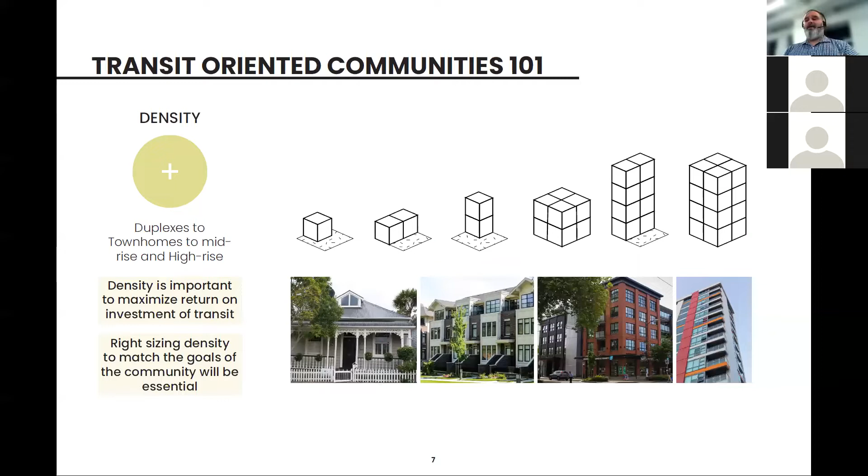I want to begin with a little bit of a primer concerning transit-oriented communities. What does this mean? For us, it means 3 things: the 3 Ds, density, diversity, and design. When we talk about density, it's not just about putting high rises next to station areas, but it's about curating the right kind of housing typologies, development typologies that would complement existing communities, but provide a variety of housing offerings or job offerings in the area itself.

When we talk about diversity, it's not just about the people, but it's really the who, the what, where, and when of a site itself. So it's everything from building typologies, the types of activities along the corridor that may complement each other, as well as that population, not just who's here today, but who's wanting to be here or looking for an opportunity to live in the community itself, but may not have those opportunities unless it's in these types of communities.

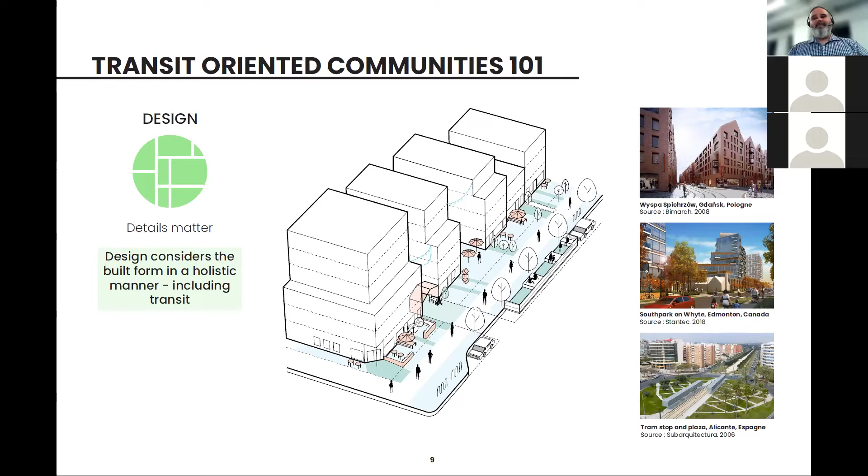And then lastly is design. This is sort of the devil's in the details. It really matters for us to understand the private development side and the public realm, and how does it interface with each other? How do we connect these through different policies and regulations so that everything meets in the middle and creates this seamless interface in our communities?

For this project, we have 4 guiding principles. These are from previous study elements; we're just adding to that as we move forward. First is PEDs, pedestrians and bicyclists. We want to make sure that from the station itself, you become a pedestrian or bicyclist at some point, whether it's transferring to a bus and then walking your last piece, or walking from the station to somewhere else. So we want to make sure that environment's comfortable and direct and clear and safe.

Development is part of this. We want to encourage development that helps create vibrant neighborhoods and manage growth, so that we're really thinking about it in a strategic way, and that everyone understands the opportunities and possibilities, and looking around those corners to understand what market pressures may change once this rail line is built and operating.

We want to create places. We want to capitalize on stations as placemaking opportunities. So we want to think about them as far as are there areas of gathering or park spaces or plazas or great architecture that needs to interface with that as well.

And then lastly, we want to elevate the transit experience. Quite literally, we just want to make sure that people who are riders by choice, but also riders by need, feel comfortable, that it's a mode of choice for them, that it feels safe and reliable. And that all starts at the ground level and works its way up into the platform and beyond.

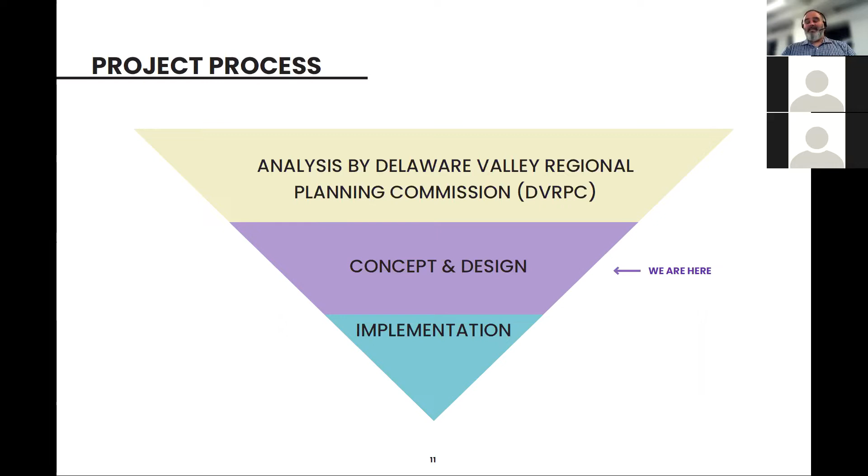So we were trying to think broadly about this and what it means for implementation, and breaking that down as we move forward. This is built on the original analysis done by the DVRPC in 2019, and we'll talk a little bit about the influences of that right now. Some of the key takeaways from this report - it was a really great report of understanding the physical area at that time.

There are 4 key components: transit-oriented development, so the buildings themselves. We need to understand how we can diversify building types that are complementary to the existing community, identify any regulatory changes, zoning codes, or policies that would help support that, but also want to make sure we support ideas around parking management, because while transit may be a key component within this, we recognize that parking will continue to play a role, but how can we think about it in creative ways and make sure new development is right-sizing parking both for the users there, but also visitors and day-to-day needs.

Pedestrian and bike infrastructure itself - we want to make sure we close the gaps around station areas and really improve safety.

Safety is really top of mind when it comes to pedestrian and bike infrastructure, particularly at key intersections, which we'll talk about at each station. Placemaking is an additional consideration, both the public realm improvements, but also using parks and trails as connections through these areas and communities. And then lastly, we want to help identify any funding sources, toolkits, and an implementation plan that can help support these changes, whether it's the public realm improvements themselves or signalization for traffic lights. We want to make sure we're thinking about this holistically, from the infrastructure to the private development side and the community benefit as well.

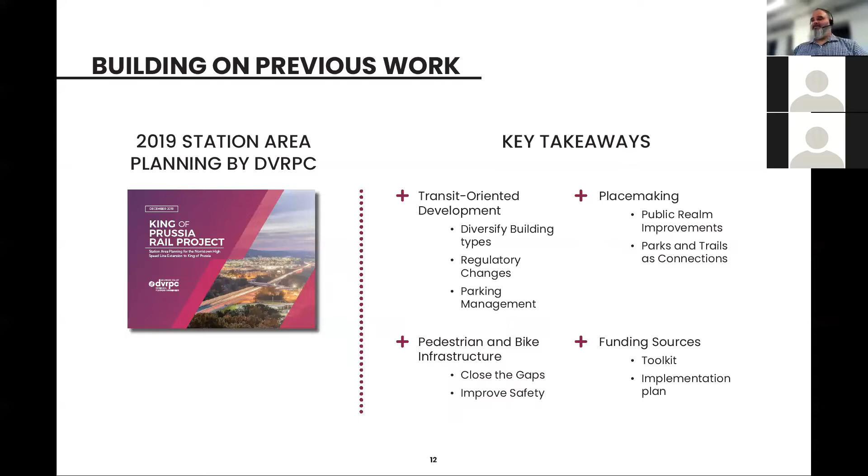Our engagement sessions are set up in three components. The first one is tonight, we're gathering ideas, we're highlighting to you opportunities and constraints that we see on the ground, both on our site visits, but also in analysis of previous work. We want you to weigh in on that as well. There will be a survey at the end of this presentation that will showcase each of the station areas, opportunities and constraints, so we'd really like your input. You live here day to day, we'd like to hear your input.

And then when we come back to you in April, we'll express to you what we've heard, show the work to date, how your comments have influenced that work, and discuss the strengths and weaknesses of each concept collaboratively, so that we can come back to you on May 3rd with how all of that information informed the final report and any additional final comments, just to make sure we're getting it right at each stage of the work that we're doing here.

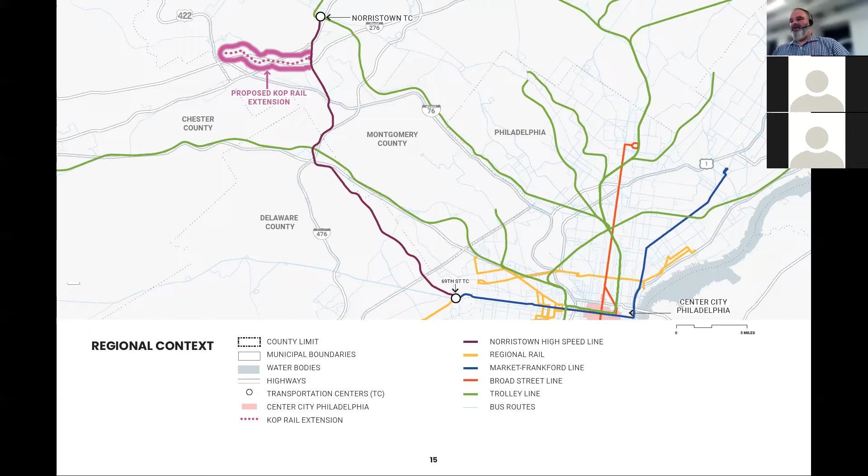As most people know, the proposed KOP Rail extension is an offshoot of the Norristown high-speed line. These 5 stations are located throughout the KOP area. Henderson Road is sort of on its own, but Allendale and Mall Boulevard are in close proximity, though they have very different service needs. And then First and American are clustered with First and Moore. While they are within walking distance, they also serve very different areas of the community itself.

So we're going to pause here and just get a little read of the room to understand where everybody either lives or works in this area. The first question is, of these 5 station areas, which one do you live closest to? Note that there is sort of that 6th option if you live outside of Upper Merion Township. We'd like to know that as well. So a few seconds here.

Okay, looks like the majority are living outside of Upper Merion. Okay, looks like majority of our users. Yeah, so we got 45% of you living outside of Upper Merion Township. Highest ranking, 23% living around Henderson Road, 10% at Allendale, 6% at Mall, 10% at First and American, and 8% at First and Moore.

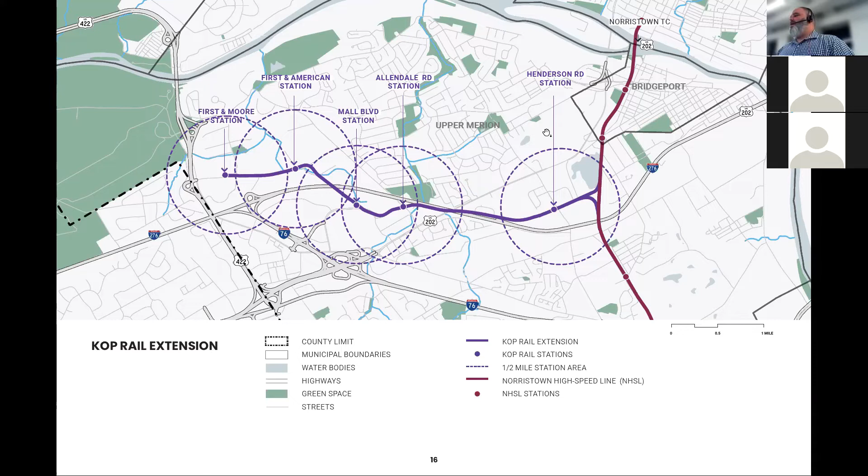So we like to understand these pieces simply to see if you're living in this area, how the changes may affect you, or even if you're working in this area, how it may benefit you as well, or benefit people around you. We want to also just talk a little bit about the world, both locally and nationally.

Things are continuing to change, but we just have some demographic information that really highlights the need to think about this in very creative ways. The first is that household growth is faster than any county, with a projected 12.7% growth in 2026. As well, within that household growth, we see more renters coming on board. Now, that isn't just a local trend, we see that nationally as well. We'll get to that point in a minute.

But we also see population growth driven by older adults and mid-career adults as well, so those may be people settling into long-term couples as well. People are living single longer these days, but looking for that growth as how it fits within household income as well. We see more disposable income, larger area income than elsewhere in the county. But nationally too, we see a growing trend of how families are living, and people are living very differently than they were 50 years ago or even 30 years ago.

We see a traditional market for single family houses is shrinking throughout the entire nation. But our housing supply continues to not match the needs of people looking for a variety of housing that isn't single family. It may be townhouses or multifamily, but our current supply doesn't match that demand. That's why we're seeing this continual housing conversation: we need to build a more variety of housing in different locations to provide that spectrum of living that people are looking for, both from what they choose to live in the market, and what matches their affordability opportunity.

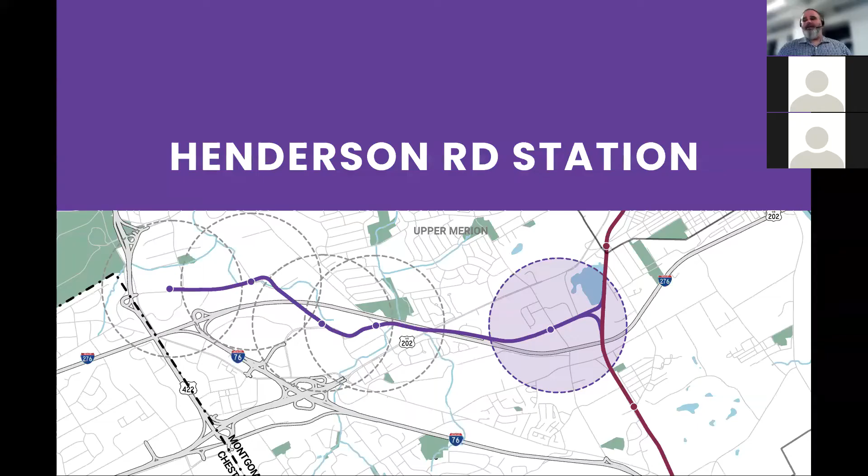With that, we want to start to dive into each of these station areas and our strategic approach. First is Henderson Road, and you're going to see a series of maps for each one. First are the physical constraints that we talk about, next are the physical opportunities, and then we'll show some identification of where we're going to be studying the possibilities of transit-oriented communities within each of these station areas.

To orient you a little bit, the purple dashed line is what we call a walk shed. That is a 10-minute walk from the station itself, which is analyzed through GIS to understand the connectivity of that station in its current form. We're going to test this both before and after our concepts to look at what that 10-minute walk shed may look like in the future if we improve sidewalk connectivity and connections throughout the area.

We do note a number of intersections that currently are uncomfortable for pedestrians and bicyclists due to their current design, so we want to look at potential upgrades or transformations that support additional infrastructure. It is a site with a number of physical barriers - there's a utility line on the south side, and a number of block structures currently have no sidewalks or gaps in the sidewalks that prevent that walkability context. Where we see opportunities are the improvement of intersections using Henderson Road as a great connectivity component, right-sizing the infrastructure in that area, as well as potentially connections to the proposed pathways and using the escarpment as an additional connection to the west.

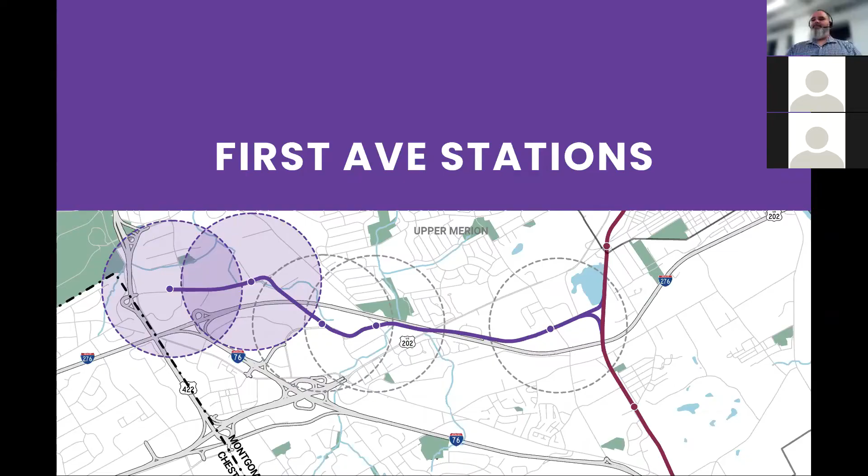Lastly, our First Avenue stations. These are in the KOP Business Park primarily. First being one of the larger connector roads and having the linear park program as part of this continues that strength of connectivity over time.

Being an end of line at First and Moore and connecting to Valley Forge as a connector through either bus service or future trailways is going to be important.

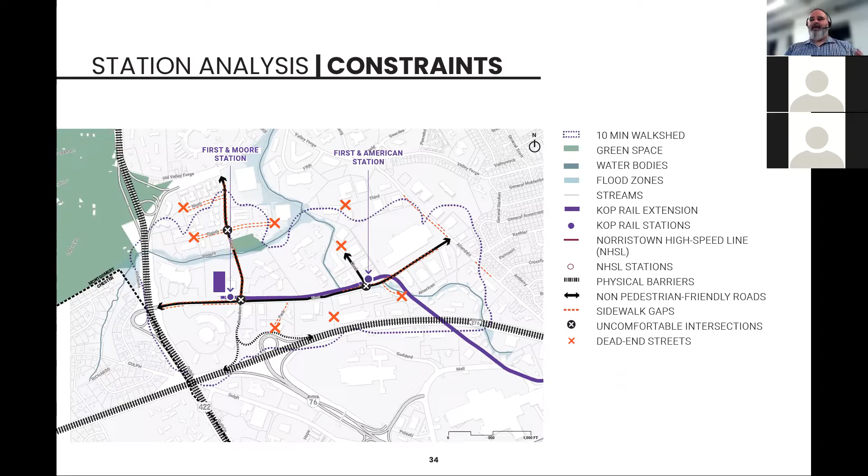But also noting that there are elements of nature. While they may be a constraint with floodplains, we see them also as opportunities for potentially adding additional amenity over time, or interfacing development with those pieces that are going to be highly desirable places to live or work.

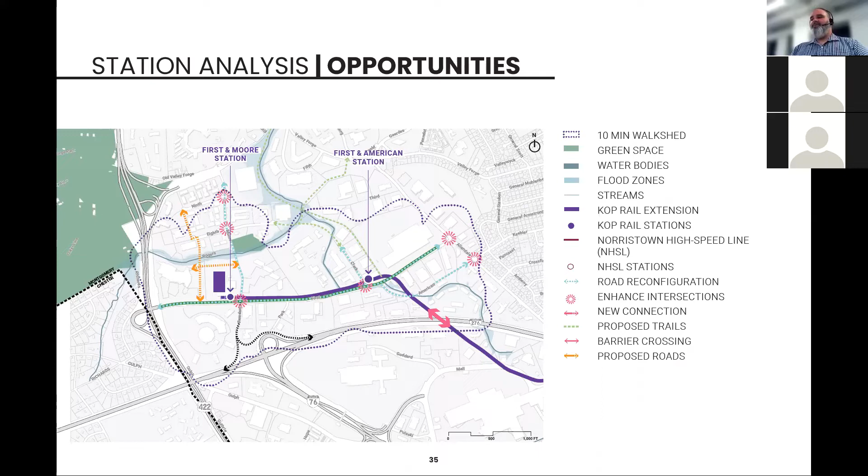We continued looking at these sites based on the 2019 station area planning. A lot of this information as opportunities continues from that, reinforcing First as an east-west connector for ped and bike, but also the potential of adding those trail systems that were first identified in the 2019 study as part of this project to help support potential redevelopment over time.

Now in these particular areas, we are showing a rather large area of potential redevelopment or development parcels themselves. We want to note that at First and American, with the office component and the road network currently there, this is seen as an opportunity for transforming this into a small community node over time.

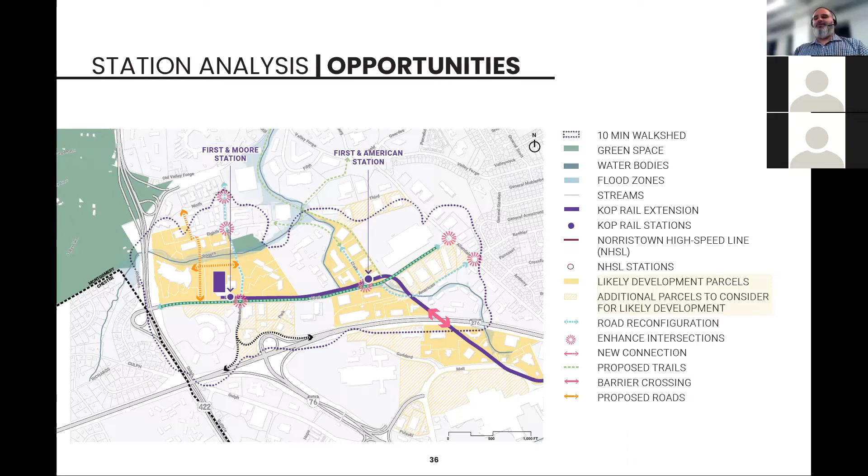But also at First and Moore, with the end of line station, how do we create a complete community as part of that process? We're seeing a number of parcels owned by single property owners at large scale, which are great opportunities for us to potentially work with them on transformation or repositioning spaces over time.

Our strategic approach for each one of these has three specific themes. I'm going to walk through them with you. These are sort of our guideposts as we're moving into the concept phase of this project.

Mobility: how do we connect people to and from the station? What are our parking strategies? What kinds of ped and bike improvements are going to be important? What kinds of bus service connecting to these stations, how does that work, and how do we make that a seamless experience?

The built form: how do we make sure we have contextual understanding of new development with existing development, and how do we make sure any new development isn't oppressive or too big, but meets all the sort of needs that we're looking for in this area?

And then lastly is that land use. What are the regulatory components that we need to figure out, whether it's just curating the existing zoning and tweaking it a little bit, or adding some additional policies that could help unlock a better option for these sites should they redevelop over time.

So when we talk about mobility, we're really looking at things like complete streets - adding to existing infrastructure to accommodate bikes, peds, and transit itself. Looking at new connections, where new roads may potentially go through these larger parcel sites to create that connectivity to the station. Active transportation, so not the street component, but maybe pathways and trail systems that come to and from these areas. And then the transit connections themselves, that interface between bus and rail.

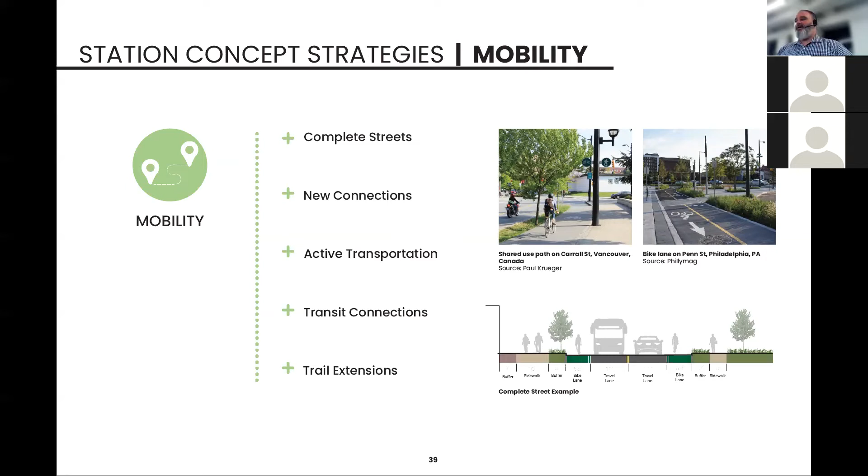Building typologies - we want to look at infill strategies rather than new development in the area. But this is an opportunity to introduce new building typologies, and they don't have to be high density. They can be this human scaled component that provides a variety of housing, from townhomes and duplexes to apartment style buildings with ground floor retail.

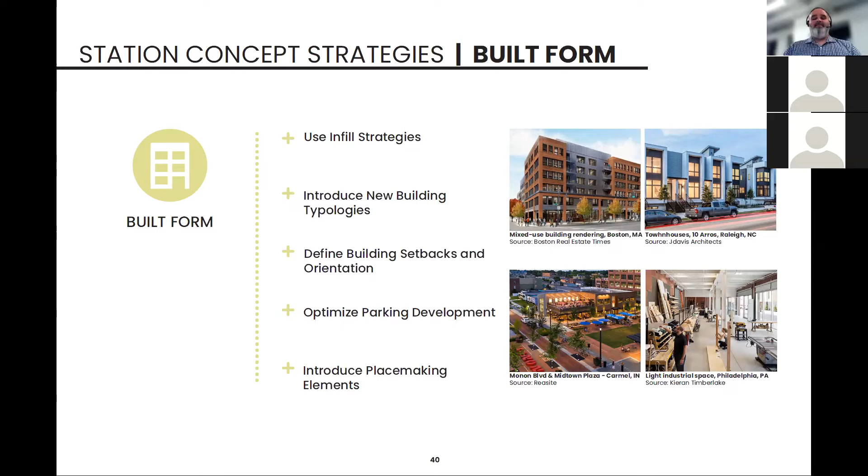With this, we want to look at the building setback and orientation of these and provide guidance around that, as well as the parking options and the placemaking elements that go with that. So where should a new park go? Where should a plaza potentially? How would buildings orient around that? And providing that strategic direction.

And then lastly is that land use component, looking at the introduction of mixed use buildings. We know some of these areas currently have zoning that allows for that, but we're examining it through the possibilities of transit-oriented communities and if there's any adjustments to that. Same thing with parking requirements, trying to right size and make sure we have the right parking supply in each of the areas that can provide for both new and visitors. And then looking at existing open spaces and how can we add to, or connect through, that creates this connected green system.

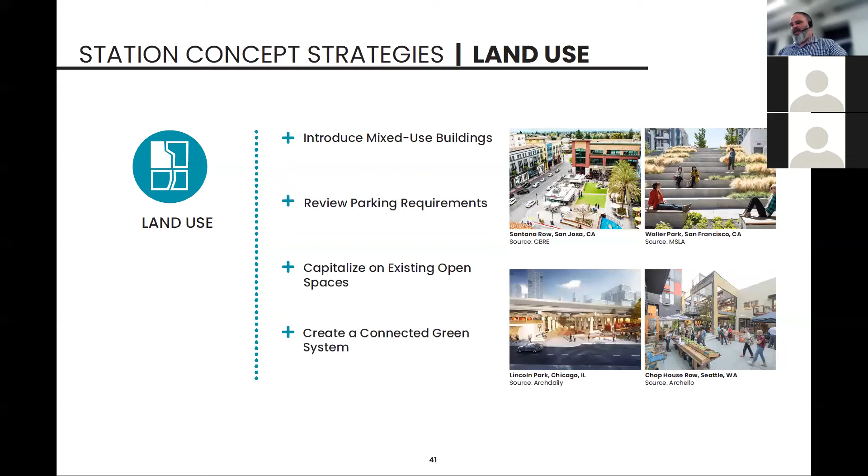So I'm going to pause here. It's at the end of our presentation. It's really an orientation tonight of where the sites are in their current form and our strategy. And I want to end with one more poll. After explaining these three strategies, which one of these would you see as your highest priority as we work through station concepts?

We got a few more in here. Your winner looks like it's coming up. Oh, a few more - sorry, don't want to influence.

Okay, looks like 45% of you are looking at mobility as a top priority, land use coming in at second, and then built form. So this is really good information to understand how we can make sure we respond to these ideas when we come back to you in April, and we'll build upon those themes as we roll out concepts.